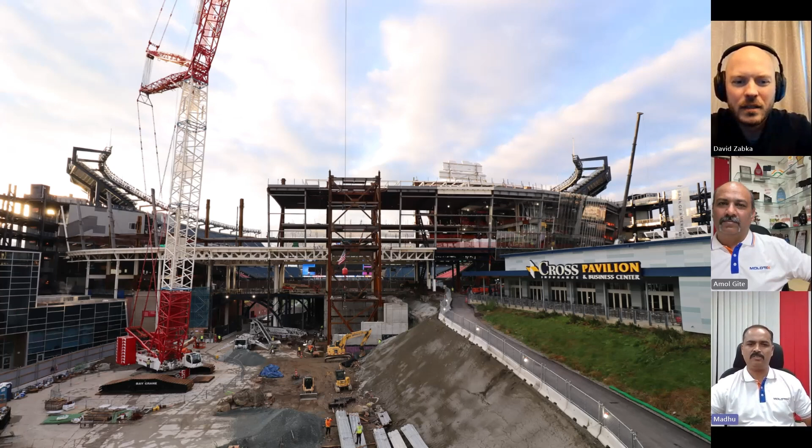Do you know how these pictures were taken? Was there a drone or something to get images up high? Yeah, I believe so - it's from drone pictures, that's what the customer said. Definitely drone pictures with high quality cameras. Very cool.

We've got about the same stage, a little different vantage point here, but I feel like we're getting into something different. So what do we got going on here? Looks like the bottom white columns are called cruciform columns - it's a wide flange member attached by WTs on each side of the web. If you see, all four sides are equal depths, so it's an assembly of two WTs and a W member. These are supporting all these trusses, and again these trusses are supporting the top columns, the inclined columns. So that is the upper concourse.

So the white steel that I'm seeing on the bottom - those are the cruciform columns, there's like 3, 4, 5 of them I see in there. That's all part of the addition, correct? Yes, correct, so from the foundation up to the concourse level, all are the cruciform columns - there are plenty of them.

I'm sure those columns are quite heavy, huh? How big are they, like depth and weight wise? Do you know off the top of your head? The depth of the trusses is maybe some 6 feet, and the weight is something like 12 tons, or 8 tons, 6 tons - a lot of varieties in that. I don't remember exactly, but we used to note that on the drawings if it weighs more than 8 tons or something, so that the crew can be careful lifting those things.

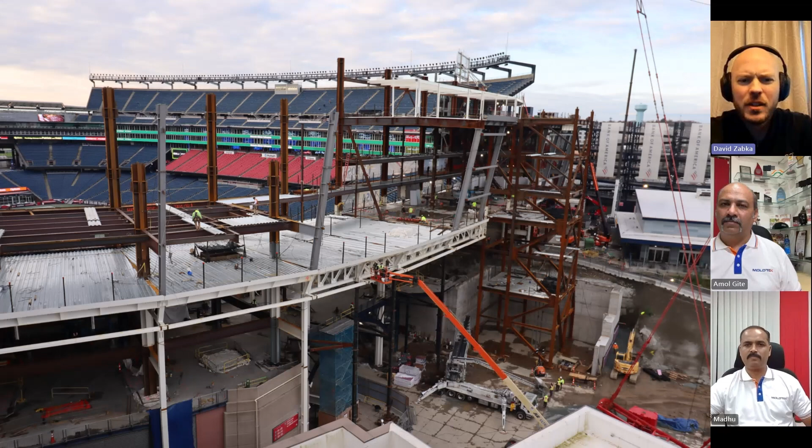Just a couple different vantage points again. So I've got a question here. It looks like some of it's white, some of it's gray, and looks like some of it's maybe unpainted. What's the rhyme or reason for what's painted or what's not?

So these cruciform columns are different paint, and the slope columns are different paint, and inside there is no paint. So we have a different kind of paint system. Some are architecturally exposed steel, very close to the walkway, and some, even though we can see them, are at a distant location with a different kind of paint, and inside are different kinds of things. So in the model we have noted all these paints to the particular members so that if we hit the status we can segregate easily, and once we put in exact data and verified it a couple of times, it's easy for us to segregate. So if we want to cross check something, we just filter it in the model and cross verify the drawings. That makes the work easy - that's why SDS2 helps us.

Very good, glad to hear that. So really it's a matter of what's maybe exposed to the elements, and then some architecturally exposed stuff might be slightly different too, then, huh? Yes, correct.

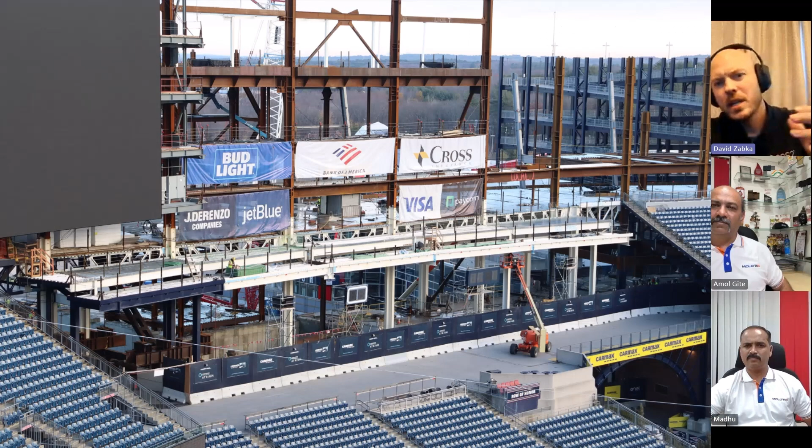So is there any additional seating to the stadium that was in here, or is it the video board and a big concourse? There's a club level, and on the video board, and on the back side we're going to see a lighthouse, an observation deck. Here we're seeing a pretty good view of that video board - that is quite the large video board there, isn't it? Yes.

So tell me a little bit about this project. What kind of challenges did you have on this project? Were there specific things that stick out that your team really struggled with, or had to be creative to overcome certain challenges on this?

Yes. First point is the geometry. We had some existing steel, and we received as-built drawings. Based on that, we modeled the existing steel. But after a period, as per the drawings, there was a difference on site. So we received a field survey, and based on that we adjusted, and some of our new steel is connecting to the existing steel and reinforcing it. That is the first point.

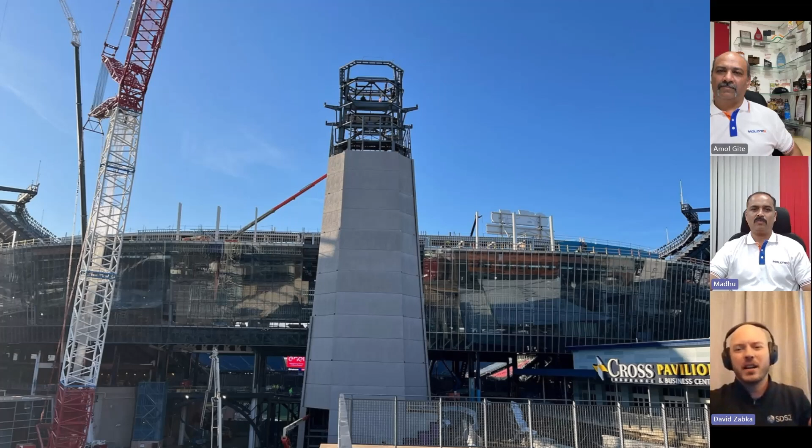It looks like concrete on the outside of this observation deck, but I can't imagine that's concrete all the way up. That covering is actually precast concrete panels, which are brought to the site, and there are connections between these precast panels. Based on these drawings, we have to make steel connections to our steel, and they're attached together by means of some fasteners.

Here we've got another shot of that. We're seeing the steel, and it's like half covered with those precast panels. We're just seeing from that side shot a little bit of it open.

Actually, all the main structural steel looks like it's up in this shot. Everything's just being covered, that must be all glass panels on this side, and then the precast panels on the observation tower. Yeah, on the main building it's curtain walls with all glass panels, whereas in the lighthouse it's precast panels.

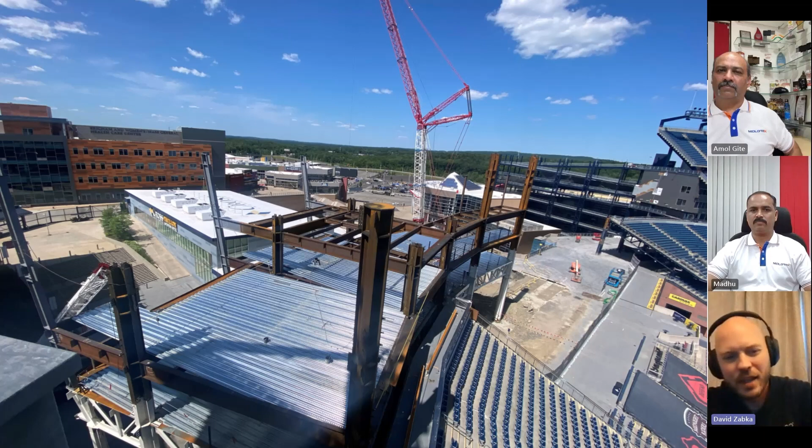This almost looks like it's a shot from that observation deck, but I'm not sure. Is it? Yeah, I think so, maybe from the side of the observation deck. Correct, what you're saying is correct.

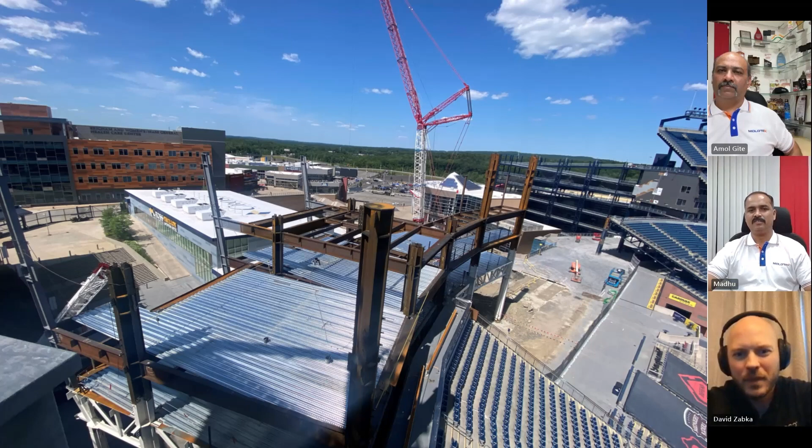Here we've got a little more steel going up. You can see the iron workers up there erecting stuff, so that's a cool picture. If you compare a human with the steel, you can see how big they are.

I imagine just based on that size, it's got to be a 36, 40-inch beam there. Yeah, all like more than W36. Okay, yeah, big stuff.

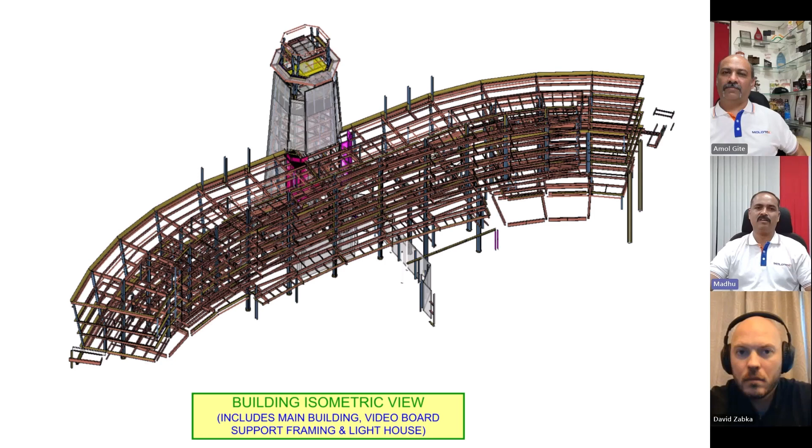So they didn't model those precast panels themselves, they imported that from a different model. Yeah, we imported some of them, and wherever we didn't get proper information, we also put some panels just to verify the alignment and all, because if we miss anything it could be a huge issue on site.

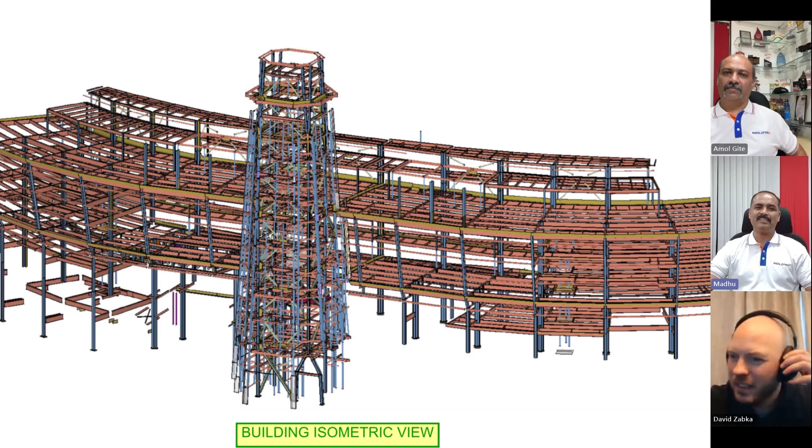So just in that lighthouse itself, it looks very compact and dense, too much steel, because it's all braces and elevated steel. Too much steel in that portion. But the heavier members are in the main steel because of the span, and it's supporting the video board.

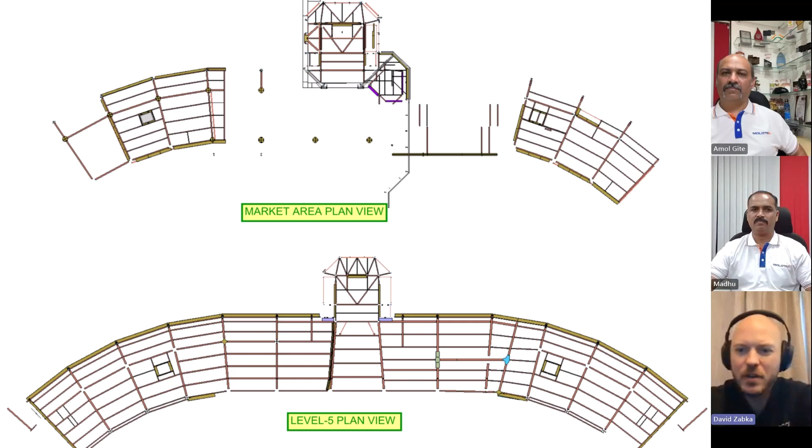Very good, I can really start to see you talked a little bit about some of the geometry and different angles going on there, so we can really start to see that in some of these images from the model. Everything's always kind of segmented, connecting at different angles, right? Yes, these are all inclined radial ones, so every grid location has some angle skewness, so we have to locate all of them in the correct place. There will be a lot of questions placing the grid lines. I can imagine.

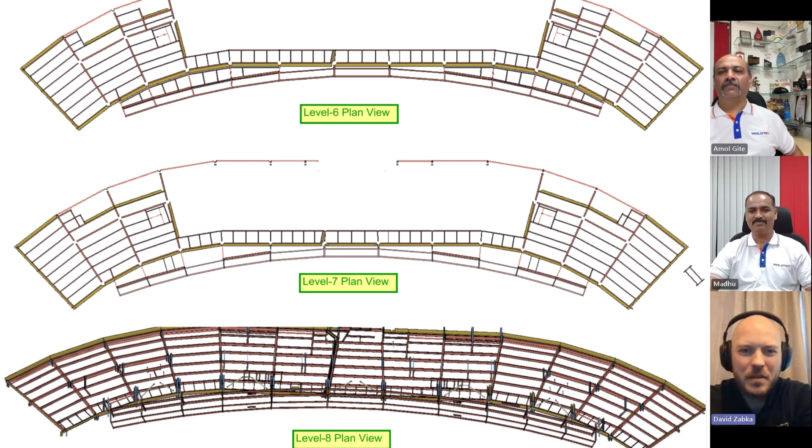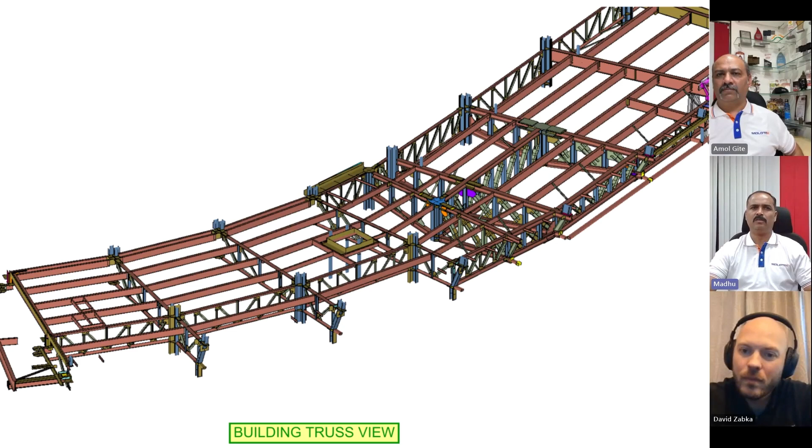Looks like it. And here we really start to see, so you described some of the trusses to us earlier, and we really see some of those here in these model shots. Then there's that one real big heavy one, kind of in the middle of all that going on, right? Yes, because of the spans, instead of beams they made it with trusses. So apart from the board frames, I think we have 37 trusses in the project.

Very interesting. And here, kind of get a little different view of some of those trusses and stuff going on there. So not all of them are just straight trusses. It looks like this one down here at the bottom, the bottom chord, is that one truss going across the whole way, or is that two trusses? It's one truss between two columns, and the back side is another truss. Some are cantilever trusses, supporting skewed columns again.

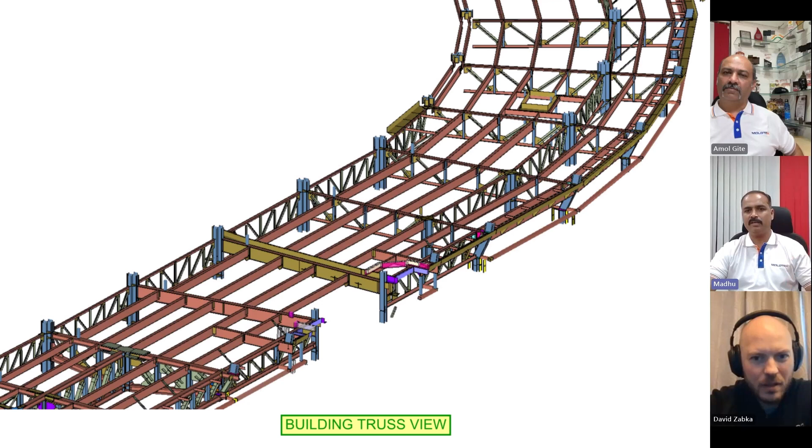I always find it funny when I look at stuff like this - the connection plates for those trusses are almost bigger than the chord piece itself. Yes, some of them are like that.

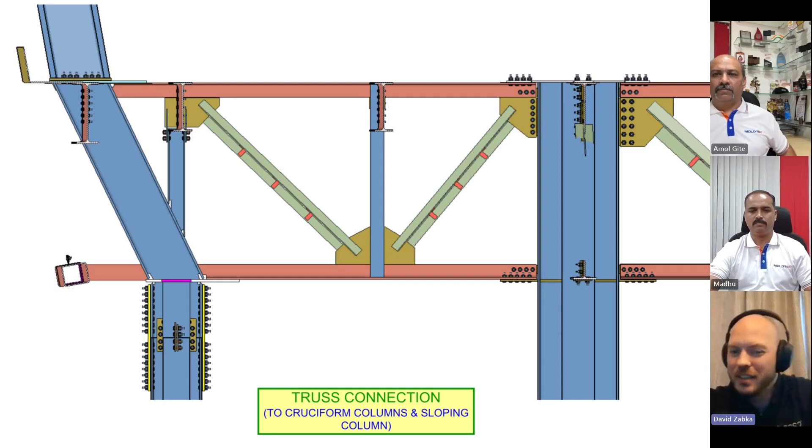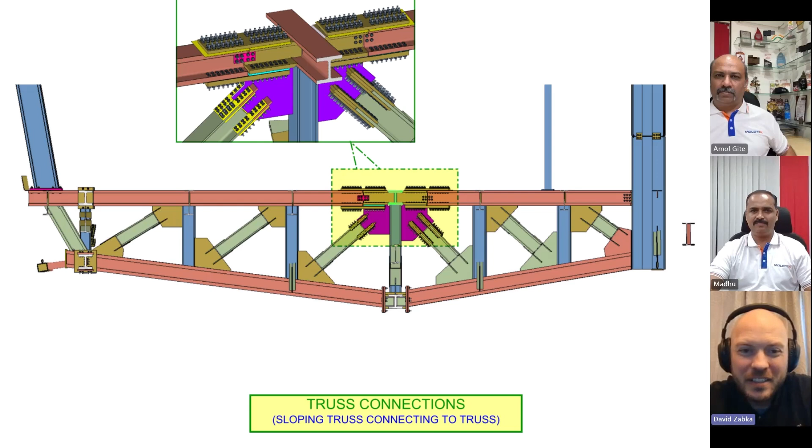So that's why you see all these crazy connections. Yeah, it's very crazy, and there's a lot of bolts in there, isn't there? Like at some junctions, there are more than 200 bolts. Yeah, that's crazy, so very cool.

I love just looking at this type of stuff, it's all very interesting to me.

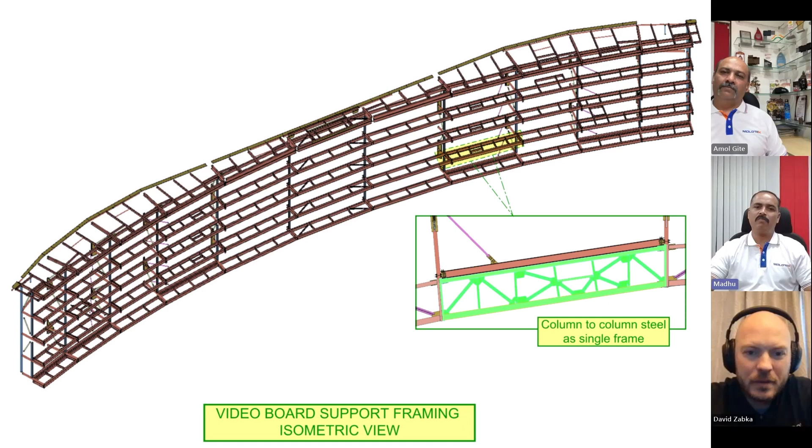So here we used group members. They are all detailed individually, but made as a group and submitted to the shop. So they make all the fabrication as individual pieces, assemble them in the shop, and ship to the site.

Stuff like this always kind of perplexes me a little bit. So those look like tube braces. Are those tube braces? Yes, we do have tube braces in this. They almost look out of place to me, because you've got these giant cruciform columns on each side, and then it's kind of small tube bracing in the middle, so it almost looks funny, like they're almost too small. But I'm sure an engineer who did all the math and knows more than I do calculated it all out properly, and everything's going to be good, right? But it looks kind of funny.

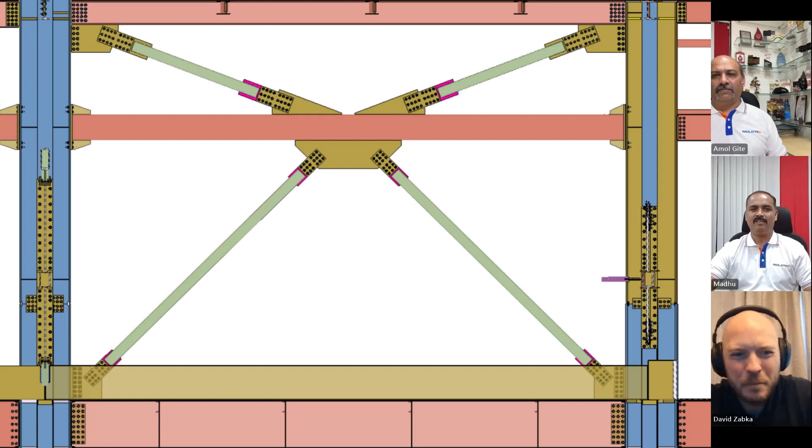Yeah, there will be a lot of checks, obviously. They must be very experts to do this kind of connections.

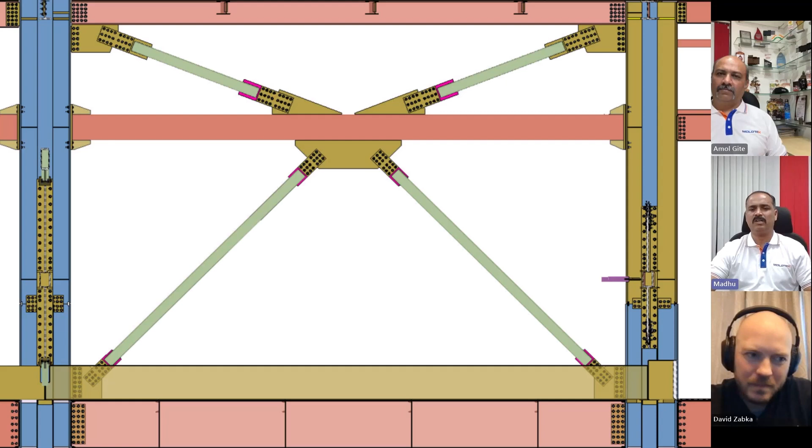But then the bolts, look at all the number of bolts that are in there, there's just bolts everywhere, isn't there? Yeah, it's all bolts because this is a stadium, there will be vibrations, so that's why they prefer bolts instead of welds. There must be some welding, but that's what I think. Earlier also we have done some arenas, and in those we also see a lot of bolted connections. Yeah, makes sense.

And this is interesting here also, a couple different shots here. So it looks like you've got an elevation of that video board support, and then here we see some of the joints that had to be able to slide a little bit that you were describing earlier, right? The expansion joints.

This is an expansion joint, it's a video board. Yeah, there is a video board there because that is fully covered. There must be wind loads, maybe because of their size, so obviously there should be a slight adjustment to adjust the forces, I think.

Okay, and then this top image is interesting too. So that must be a tube column in there, but it's split about 4 times with plates in there, is that what I'm seeing? Yes, correct, because those are all moment connections, so there are plates in between. So the beams are welded to those plates.

That cannot be possible to a tube, maybe because of loads or various reasons, so those are all full penetration welds. We have no option, there are small gaps like 1/4 inch or 3/8 inch between the tubes and the plates that will be welded, filled with all the weld. So those tubes, it's a little hard to see, it's a little far away, but looks like the tubes are prepped, so there's a full pen weld all the way around those tubes welding to those plates. Yes, correct.

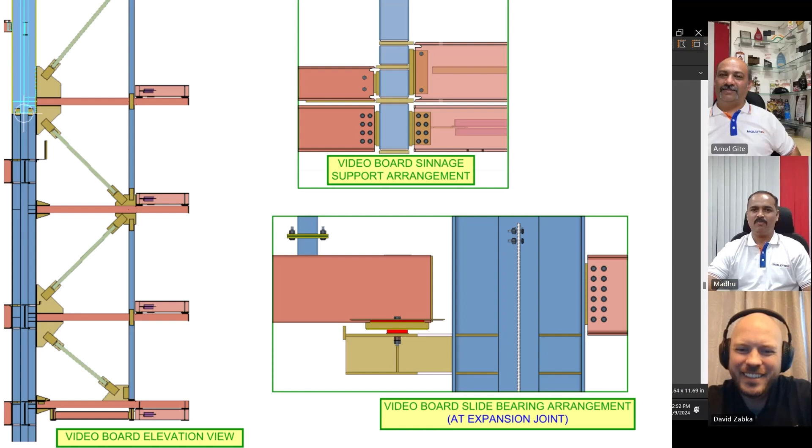I'm guessing the fabricator was upset about that, that's a lot of welding and a lot of labor for the fabricator to do stuff like that, huh? Yeah, the fabricator is Cives New England division, so they are pretty much experts, they have done so many projects. We have been working for them for more than a decade, almost 15 years, I think.

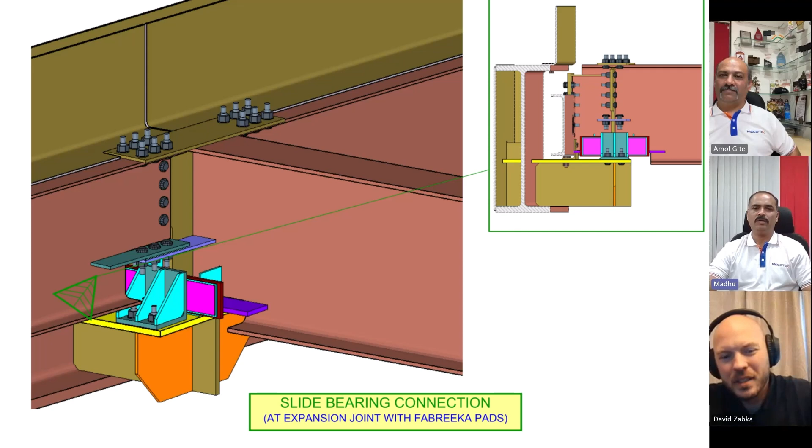And we've got another slide expansion joint here. So yeah, there is a continuous expansion joint in the building, so there is a slide bearing connection at that expansion joint. Very good, very cool. There is movement allowed in that particular connection.

So what's going on here? This is another sliding bearing connection at existing steel. There is existing steel and the new steel is connected. It's pretty much similar to the expansion joint, but the difference is at expansion joints both ends are new steel. Here it is the existing steel on the right side.

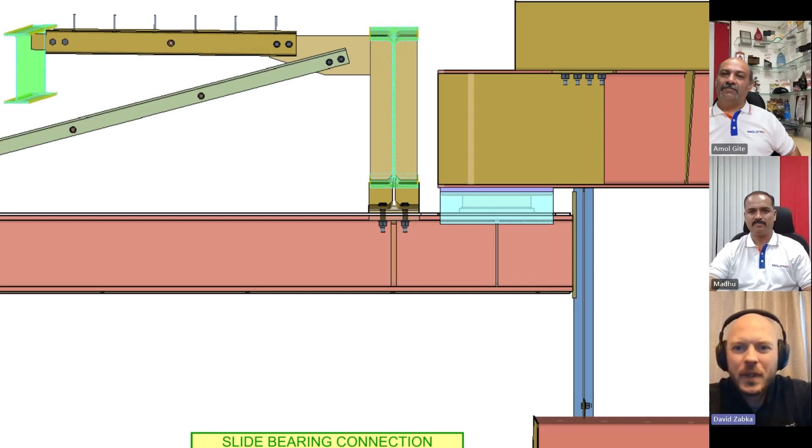It's kind of a close up here. This is a perpendicular view of a bearing connection at one junction. It seems like both are in the same plane, but on the plan both are at different angles. These two bolts are movable, so we made them in the same line. This is an average angle of both directions, so that the bearing can easily move along the long direction.

Are those back-to-back channels I'm seeing there? No, they're assemblies of plates and Fabreeka pads. Above that, what's running like the cross section are channels, yes. Those are back-to-back channels, probably some sort of spacer plate in the middle there. Yes, correct.

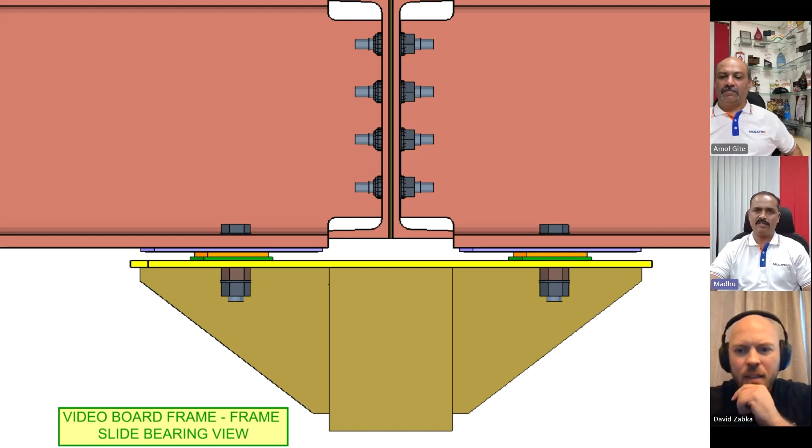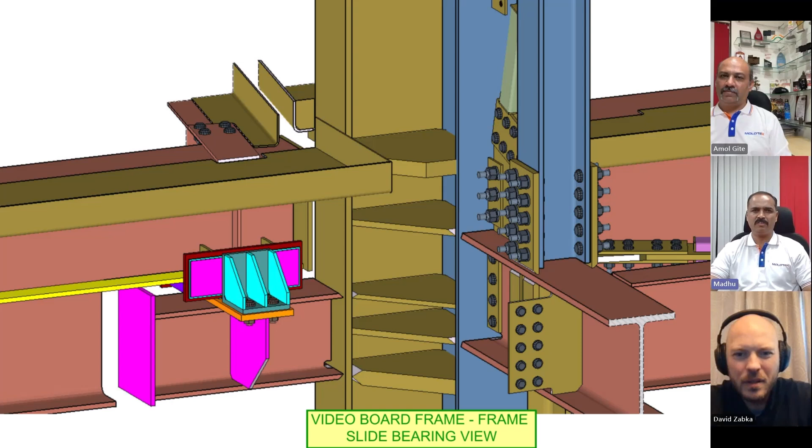It depends on the flange thickness. We have in some places 1.5 inch, 1/4 inch, and 1 inch. A lot of varieties of stiffener plates are there. Some are like 1/2 inch also. It depends.

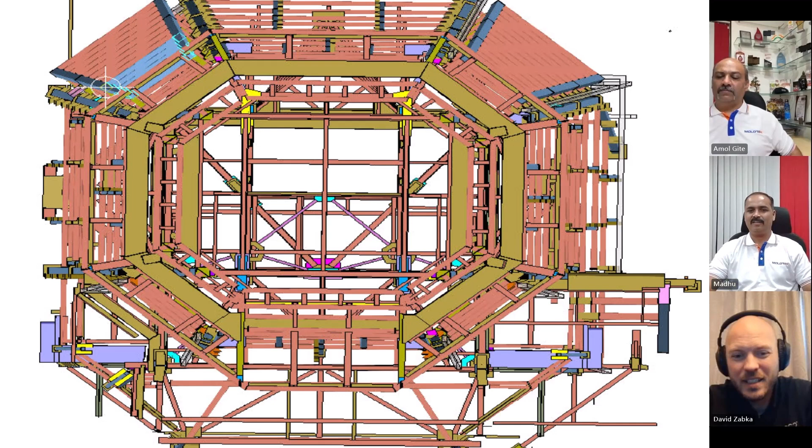And a shot from the top here. This must be a plan view of that lighthouse from the top of it. Yeah, it's from the top view. You see, going down, its area is increasing, getting bigger. Very cool.

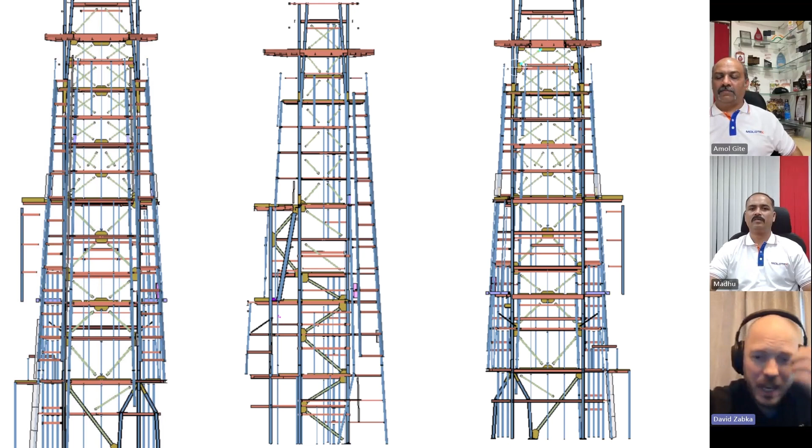Couple elevation views, kind of looks like we got a section cut through the middle or the sides of that. Yes, correct.

So these are... there's a lot going on in this one again. There's connections and plates and bolts everywhere. What's happening here is we have splayed columns and horizontal braces, vertical braces coming at the same junction. That's why the connections are so complex.

Apart from that, there are precast panel supports also there, which makes it a very complex connection. So they cannot be erected that way, so what we've done is they are shop assembled at that particular junction and all splices made. If you see, the yellow color ones are shop assembled, and the blue ones are field, there is a splice there.

That makes sense, I see that. And again, pretty heavy, looks like everything's prepped for full penetration welds, all pretty heavy stuff. All are full penetration welds.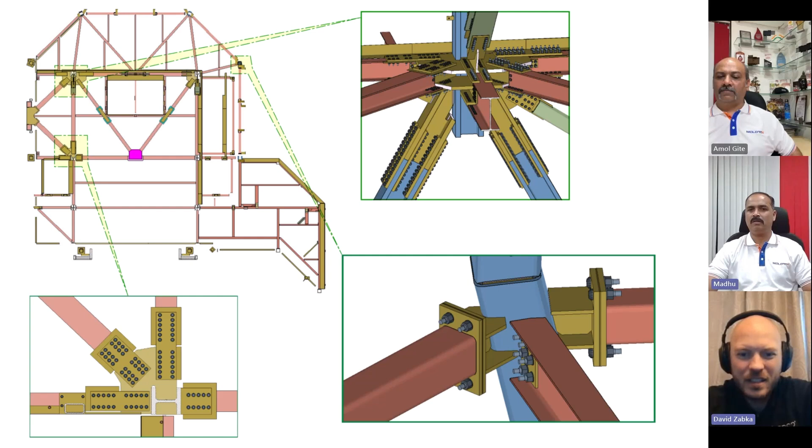Very interesting. Looks like probably just some different angles of some of those different connections then.

More very similar stuff here, there's bolts everywhere, plates everywhere, there's just so much going on here. So here's that observation deck you were talking about also then, huh? Correct, yeah, this is the observation deck.

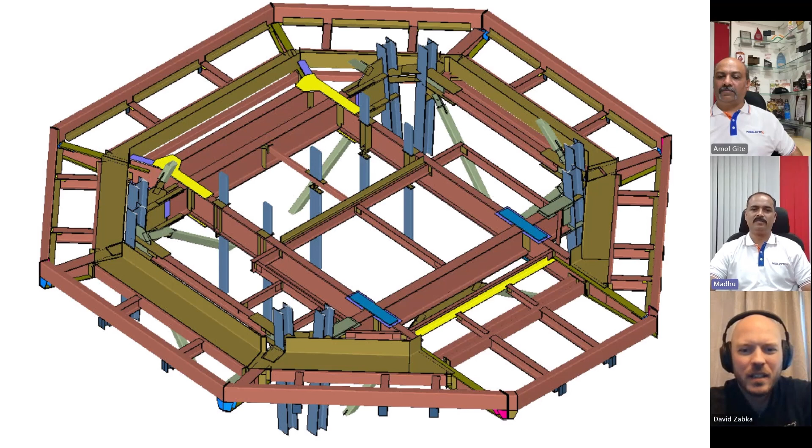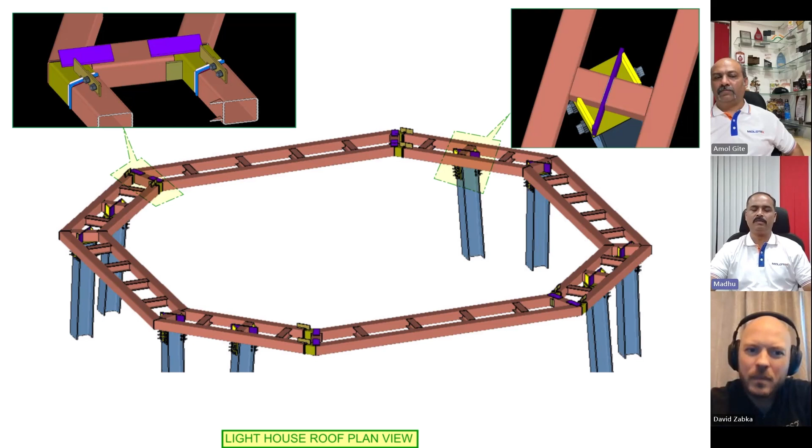Very cool, and we've got a complete roof plan. Is it kind of a tube structure, almost like trusses? Would those have been assembled in the shop and erected as about eight pieces just to erect? Yes, correct. All of them are shop assembled and field erected. Very good.

And some of the connections up there are connecting the columns that split. Yes, you're connecting to both of the columns that are split. Apart from that, we need to place precast panel supports also, which is why the connections are so clumsy and complicated.

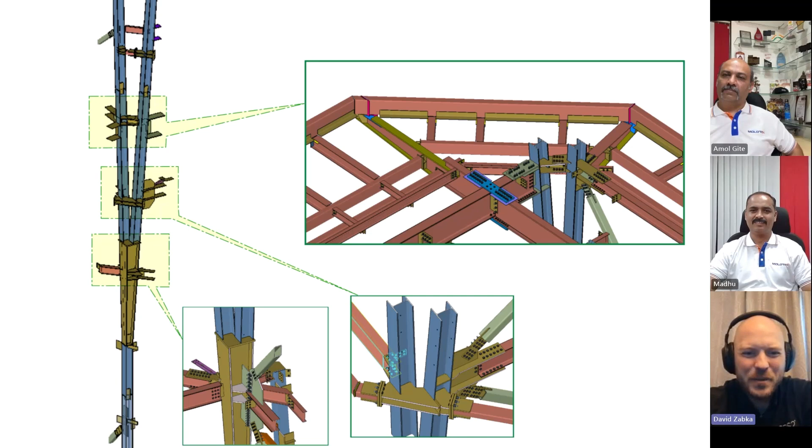That's quite interesting here. This is quite the project. I'm not even sure how to describe this, so I'll let you do your best to describe what's happening here.

There are two different connections here. One column is supporting another column, as you see in the picture, so there are connections made between the two columns. It's starting from there with no base, and it's supported by the parallel column. That's why there are so many connections to give a firm connection. So there's basically a column floating out in space that you had to figure out some crazy connections from another column to support this column hanging out in space, essentially. Yes, correct.

So was this all shop assembled? The columns are not shop assembled, but the connections are bolted, field bolted, or have temporary erection bolts.

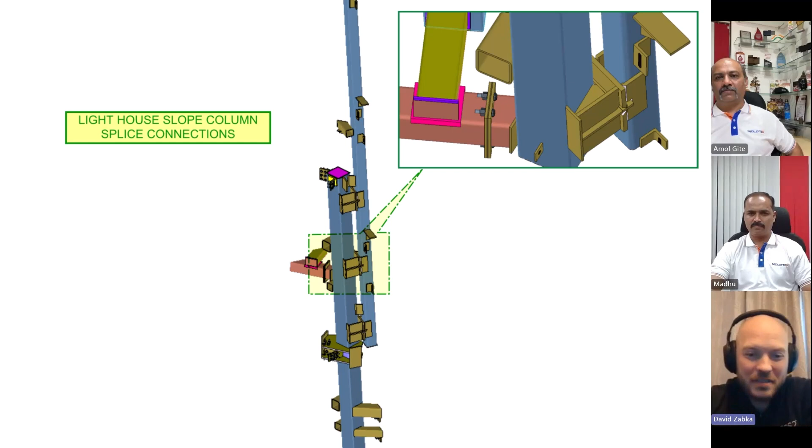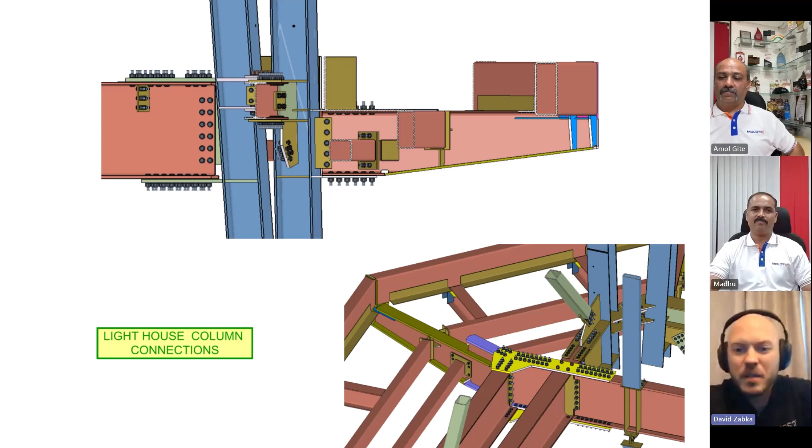This one kind of blows my mind a little bit, actually. Got some more crazy connections happening here, huh? Yes, correct. You see that observation deck - that's a cantilever member which is supporting all these observation deck members, so that's a moment connection again, and that is a sloped column going in two different directions. Oh, that's one of those split columns we saw a couple pictures ago. Yes, got it, correct.

It's another elevation view. Describe this to us, I guess. It's the bottom side, so there are sloping columns because two columns are supporting at the bottom, and you see that overhang portion - that's only in one direction, not for the entire lighthouse. It's only in a particular area.

Got it. And so here we really get an elevation view and a section of what you were describing earlier, those heavy joints, but they're all shop assembled, and we've got the splices going on there, right? Yes, that particular junction is shop assembled, and all are made with the splices.

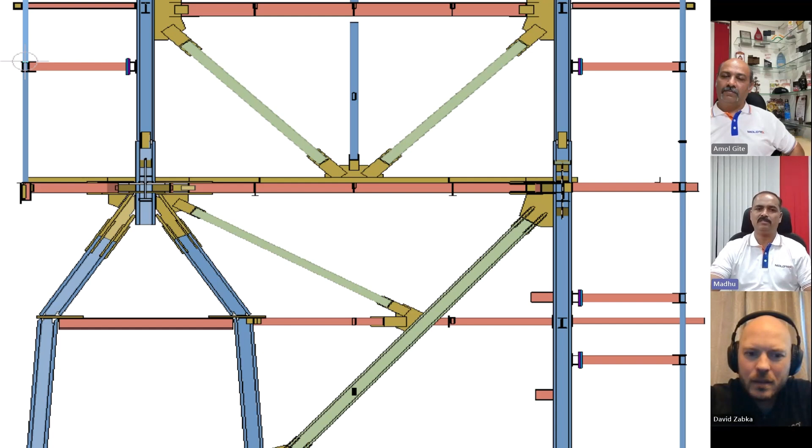I have to apologize to our audience who doesn't get to see these images, because no matter how much we try to sit here and describe it and put it into words, there's no way for us to really put this into words, what we're seeing on a lot of this stuff, as crazy as it is. Pretty wild, yeah.

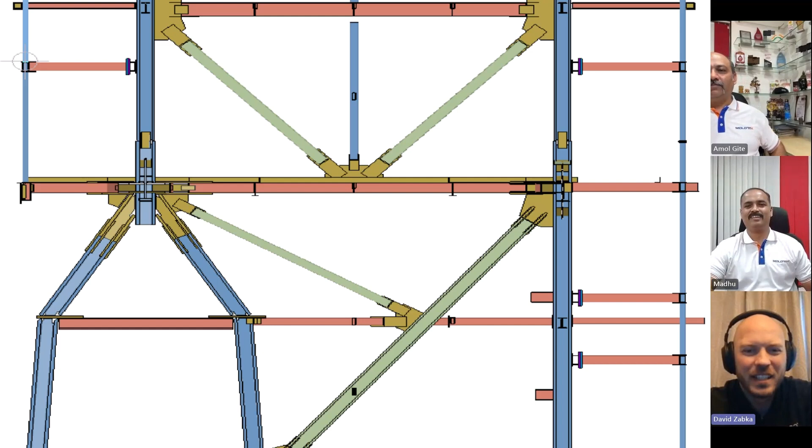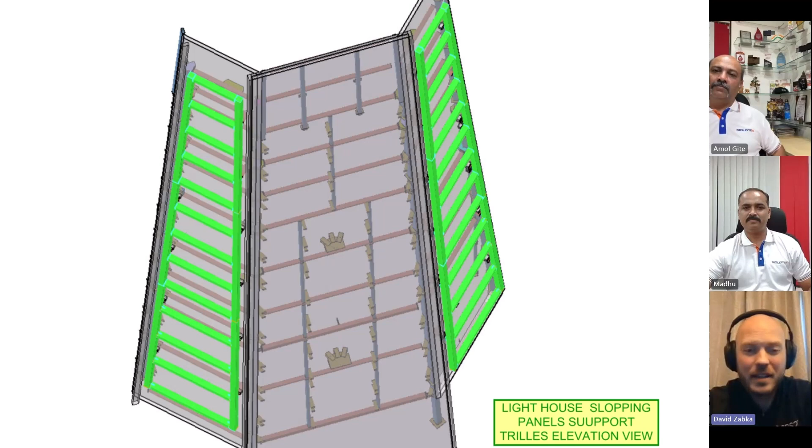There's a bit more - we're seeing the supports now for those precast panels that cover that lighthouse, right? Yes, so you see how they are sloped. This is not a two-way slope thing, it's falling like this, and this direction is coming in. So just to locate them, once we locate them properly we can make the connections. But locating them requires a lot of trial and error, and we have to send a lot of RFIs, a lot of coordination - it takes a lot of time. Yeah, sure, makes sense, I can understand why it takes a lot of time for coordination here.

Yeah, very good. Well, you know what? Great job to you and your team. Looks like that was quite the project to work on.